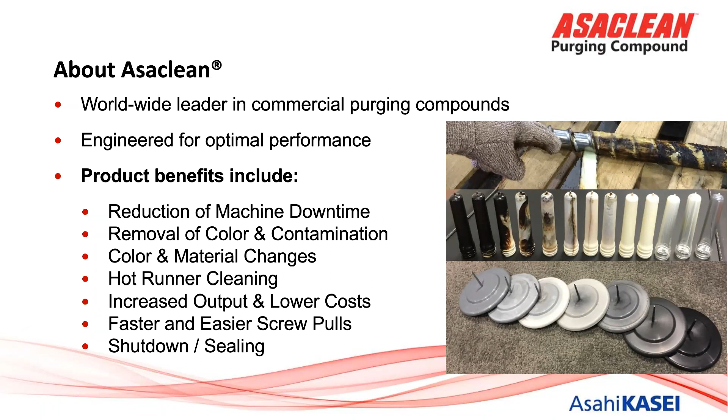So what we begin with, when we want to move toward seeing if we have a recommendation for you, we want to understand your process. So some of the basic things we all need to have crystal clear: what are your applications? Is it color changes, material changes? Is it screw and barrel only? Would you like to purge through the hot runners?

Do you need to remove carbon specks from a clear application? Machine count and size, so that we can appreciate what quantity of purge you might be expected to use, depending on the machine size and the nature of the application. Also, the type of purge compound will also determine the purge quantity.

What production and quality issues are you seeing? Which customers care most about the aesthetic of their parts? What's important to your customers is going to be important to your purge program, so that we can deliver on time, or so that you can deliver on time parts, and that they're up to spec with no defects.

What type of products do you make? So that we understand also what the aesthetic quality is, or the part integrity. Sometimes an all black part still needs to be confirmed free of contamination, because if there's any carbon in the part, it could affect the product's function.

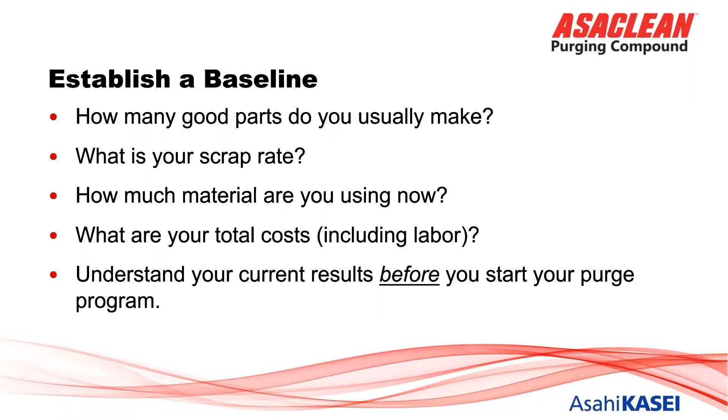It's what you're currently doing now, and what a product like Asaclean can help you get in savings. So understand your current results before you even start considering a purge program, so that it could be clear when there's an improvement. Peter Drucker, the famous businessman, said you can't manage what you don't measure. Couldn't agree more.

Okay, so for grade selection, we'll understand what your process is. We have grades for all thermoplastic processes: injection molding, extrusion, blow molding, compounding, blown film, even recycling extruders.

And we'd like to understand what are your expectations, or what are your previous experiences with purge compound. Maybe there's some gorillas in the room we need to address, or some fears we need to assuage with some direct addressing of your past experiences. We have enough products in our line so that if your issue with a prior purge was too much residue, we can be sure that what we recommend has a particularly low residue characteristic for a certain resin, like acrylic or polycarbonate.

And what are your current pain points? Obviously, purge is part of a problem-solving solution. So the problem usually is the pain to the company, which is lost machine time or too much scrap. And especially this day and age with resin shortages and sourcing issues, we want to understand what's urgent to you. And then we choose a compatible purge.

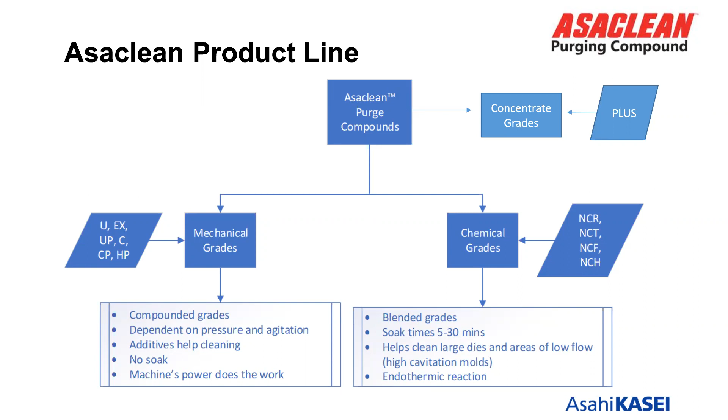You're able to control the ratio, so when you need more cleaning, you can modify the mix. A few different ways we can go here, and I'd say it's a good problem to have, lots of options. That would basically help us deliver a more refined grade recommendation.

Mechanical purge compounds, simply put, scrub and clean strictly on the path that they travel on. So a mechanical purge does depend on pressure and agitation that we hopefully can obtain from the machine. Injection molding is therefore just a perfect marriage of a process for mechanical purge compounds, because we have the luxury of a reciprocating screw, controlling screw position, back pressure, rotation speed, and injection speed.

So with the right procedure, Asaclean is a good product, but when used with the right procedure, it can reach levels of pure excellence. So we ask you as a favor, and thank you ahead of time, please follow our instructions so that you can be sure you're evaluating the cleaning performance as accurately as you can, and so you know what you have on your hands. It has very safe additives, nothing that's going to be considered abrasive, that's going to damage the screw surface or the barrel walls or the hot runner systems, so long as we recommend the right grade.

And there's no chemical reaction, so there's no need to raise temperatures. There's no soak time, so there's no need to wait around for the purge to do its thing. A machine expert is going to really use a mechanical purge as their own tool, and they'll know how to guide the machine to do all the work.

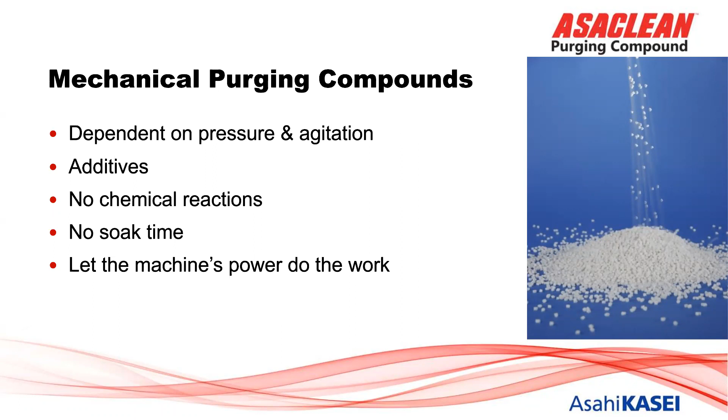Chemical purge compounds, on the other hand, while they do have carrier resins, and in some cases a relatively stiff carrier resin where you will get some mechanical push, the majority of the cleaning performance accomplished by chemical purges is through its chemical reaction. It's an endothermic chemical reaction. The only byproducts are water vapor and CO2, so no need to run for the hills. There's no toxic byproduct to the chemical reaction.

And it helps address cleaning in tough to clean areas - extrusion blow molding heads, extrusion dies, hot runner systems, or even an injection screw and barrel that might have some wear, some cracks and crevices, some valleys in there that we need to get into that a mechanical purge might otherwise have just walked right over, walked right on past. So a chemical grade is important for those types of applications and trouble areas.

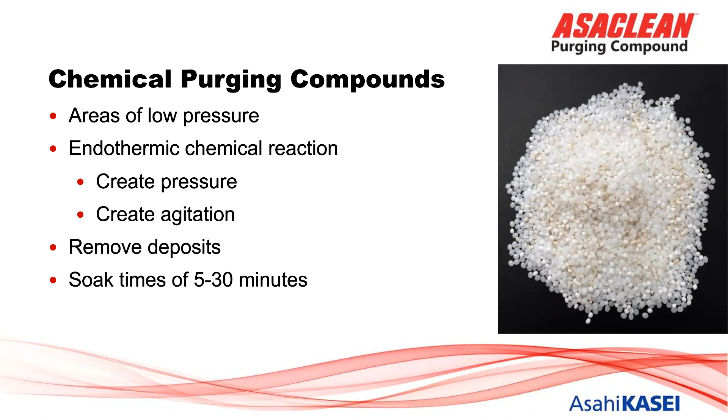Soak times are around 5, 10, 15 minutes, 20 and 30 on a rare occasion, but depending on what temperature we're at, that will dictate how long the chemical reaction will go on for.

Earlier this year, we launched Asaclean Plus, our first ever purging concentrate. The purging concentrate technology is derived directly from our chemical grades, and it's a way to supercharge your processing resin. You will only be receiving the active ingredients, and you can adjust the ratio depending on what cleaning is required, which does allow for some pretty amazing results when it comes to on-the-fly purging.

So even though it is a concentrate, meaning that it's like our chemical grades where there is some soak time and some possible temperature adjustment, it's possible that we can run this without requiring process temperature changes. So it's a pretty bright future for concentrates to have their place alongside chemical grades and mechanical grades.

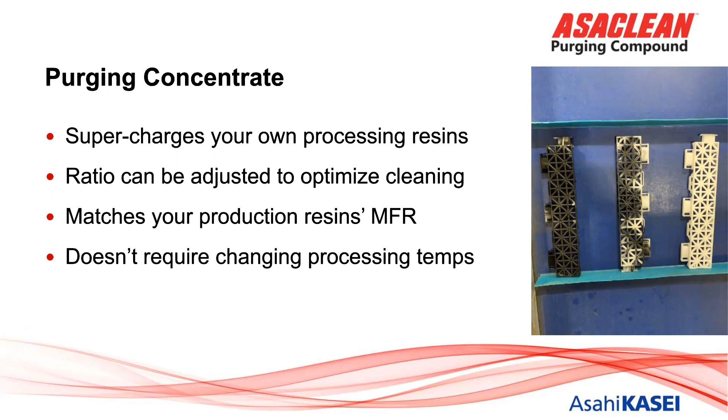Some tips in injection molding would be, for example, to improve the cleaning in the nozzle body area, the check ring area, which is really where the majority of hang-up can occur as far as the screw and barrel is concerned. Increasing the temperature in that nozzle body about 50 to 100 degrees can solve an issue that might otherwise be a nozzle body teardown that takes 4 hours. So be careful with resins that are likely to hang up in nozzle bodies, like Santoprene, for example, is a real pain in the neck. But sometimes it's simply just a nozzle body issue, or a nozzle body design issue.

We also have purges that are moldable. So for hot runner purging, we do have a closed mold method that takes advantage of the pressures of the system, and that will lead to less purge quantity used. It's another way of taking advantage of the pressures that the system and the machine provide to help a mechanical grade that's moldable do its thing.

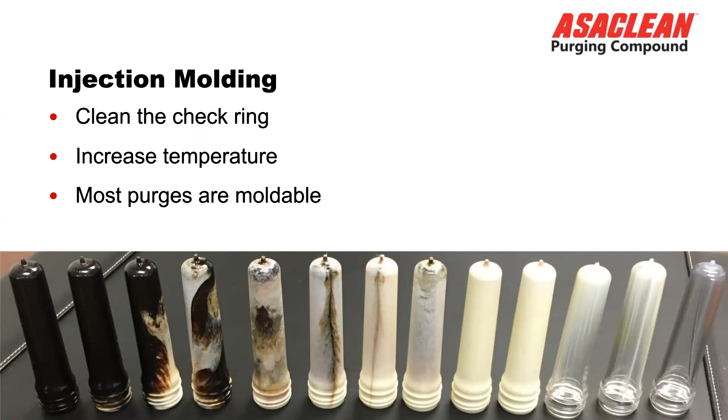So for extrusion, for many years we still do have mechanical grade success in extrusion, but some hardware in the extrusion process does benefit from chemical grades, like die heads, downstream equipment, breaker plates, and gear pumps.

So particularly the screw and barrel also - there's a low pressure concern in general, right? Extrusion is a lower pressure process than injection, so that does take away a mechanical grade's ability in some cases to perform as well as a chemical grade. So here, this is an instance where we have the crossing of two different possible solutions. Both mechanical and chemical have their respective high probability of success for this process.

So twin screw applications, also no problem. Obviously, we just be careful with the starve feeding as opposed to flood feeding. Make sure that we're keeping an eye on torques and pressure plugs. And then, of course, the areas adjacent to

vents, a vented barrel - those zones near the vents, because it's lower pressure, you could have some issue getting some mechanical scrubbing there as well. We'll ask you if you can plug those vents, because if there's a chemical purge compound being used, we'd like for you to help contain the gases as they're created from the chemical reaction. And so we're able to address those, or at least take those areas into consideration when making our final recommendations, both on product and procedure.

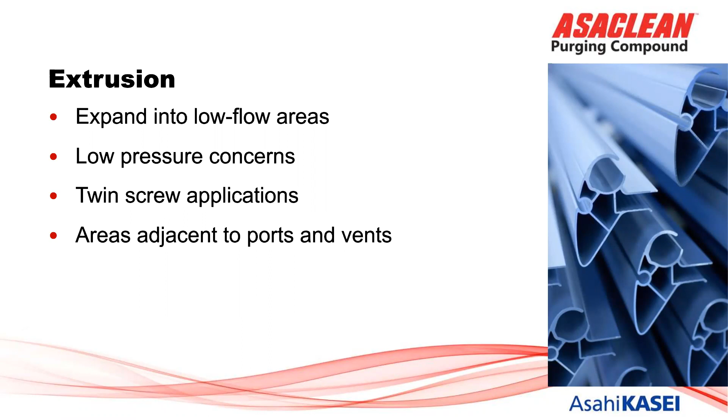All right, the cost factors. Let's get into it - cost per purge versus cost per pound. So clear difference here. Cost per purge includes the time that it takes converted by your machine hourly rate, and includes the amount of resin that was used to displace the purge out of the machine, and also the amount of resin total in your scrap on your next run, which we presume all these measurables should improve when compared to a better purge option.

You'll have less lost machine downtime, less lost machine time, less scrap, all of which should help reduce that total purge cost, which is really the cost that we should be looking at - cost per purge. Cost per pound is really only one of 6 factors when looking at a cost savings analysis. So giving a cost per pound any more priority than 1/6 of a solution, it's a risky thing to do.

So we look to be consistent in the data collection. Make sure that what's measured and what matters with your current purge program, that those same measurables and that same data be collected with whatever new purge method or purge product you're looking to consider. In the end, comparing 2 purge methods should be very easy as far as seeing which one is best for your company, because 99% of the time it's the one that costs you less, or the one that solves your problem, the one that makes your customer happy.

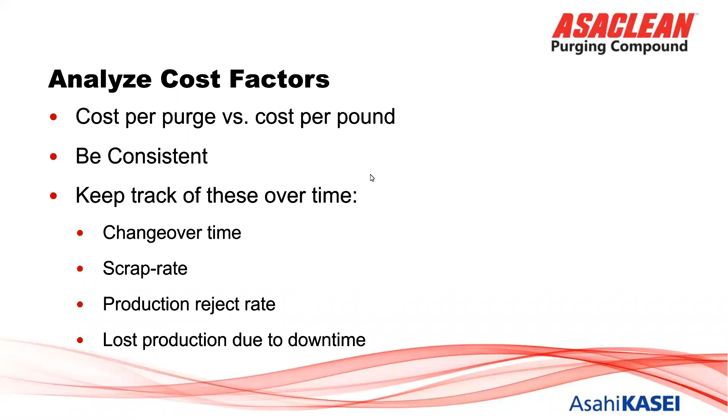So keeping track of these over time is critical. If we want to see what effect a purge has on these particular measurables - time, scrap rate, reject rate overall - and knowing the corresponding cost factors, it'll help you get to a cost savings analysis real quick. And that's the best place to be as far as comparing 2 purge methods.

So why use a purge? Well, it improves safety. If you can see the look on some of these maintenance guys' faces after we save them from having to pull a screw, they can spend their time on other tasks, far less dangerous tasks.

Obviously, increasing machine capacity - if you're having trouble filling orders for 10 customers, well, then you can't consider being a 15 customer business or bringing in more business. So freeing up machine time is a big one for purge compound.

You lower your maintenance costs, obviously, because the expectation should be that a higher performing purge compound will send your screw off to maintenance far fewer times a year, or maybe never in best case scenarios. So it's common for customers who, before implementing an efficient purge program, were pulling a screw every month, every couple months. After successfully implementing a program, now it's every 18 months, or they can't remember the last time they pulled a screw.

So it's just a question of efficiency. It's going to improve the usage of your resources, from energy to manpower to resin to machine, and that first pass yield is always nice to see on the production floor. Where as soon as you get started, that's when you're really getting started, and it's not beginning with a few hours of contamination or prior color showing up in the part.

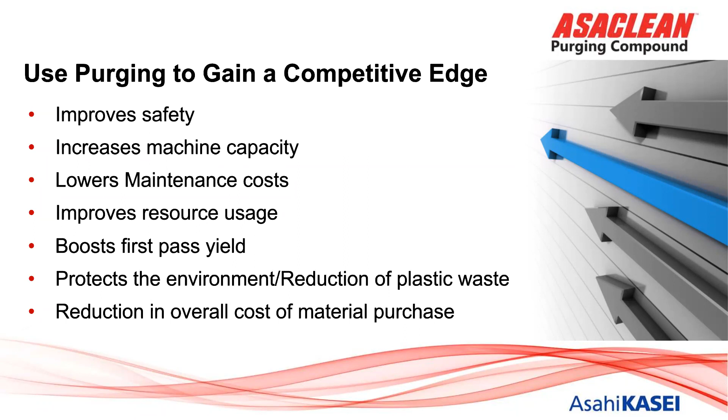This is stating the obvious, but please follow the instructions to the letter. It's just a question of making sure it's communicated that we're not saying it's a lack of trust of the process engineer, we're not saying you don't know how to purge a machine. We'd just like you to use this particular product's specific recommendations because it's going to work better for you. You're going to use less, it'll clean better, and you'll use less of your own resin to get the purge out. Following our instructions for both purging and displacement, that's going to get you to the promised land. After you consider what we recommend, you're certainly free to try something if you think it'll lead to better efficiency. And it has happened.

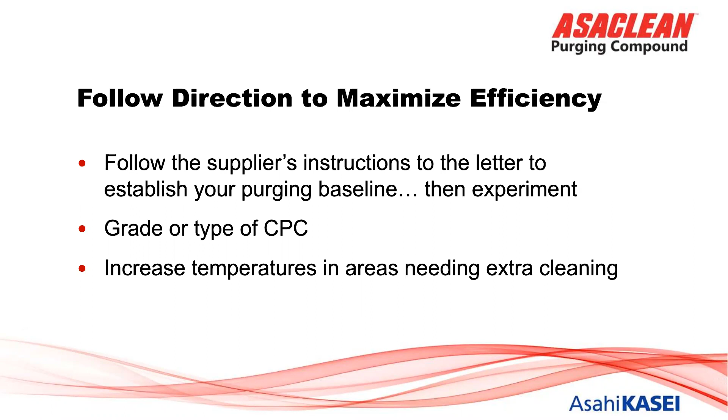Together, we will help you determine the grade and type of purge compound best for your needs, and we'll make sure to give you those important tips on the temperature profile of your system to get the best possible cleaning as well.

In-house purge compounds are very common, but we should always look at their possible deficiencies. Are they resistant to oxidation? Are they thermally stable? Can they withstand being used as a shutdown sealant? Are you creating possible layering inside the machine? How are your startups, what do they look like? Are you seeing contamination from the resin that was run last week? Also consider the viscosity of the in-house purge - is it easy to remove with your next material? So on and so forth - just different possible pitfalls for in-house purge compounds, resins, and regrinds.

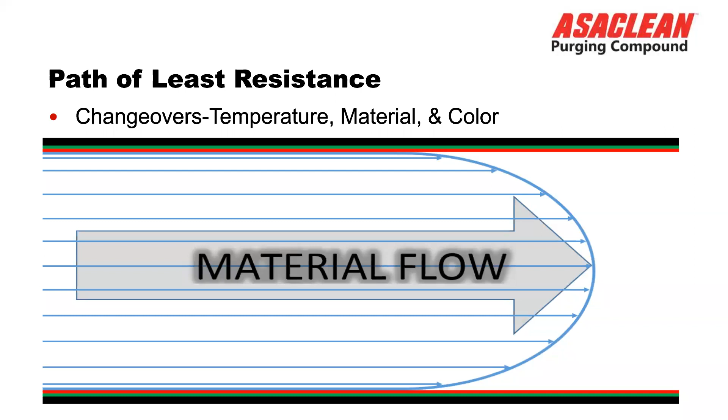According to the science of fluid dynamics, normal polymer behavior is a laminar flow, where the higher rate of speed is right down the middle. Towards the channel walls here you see the red and the green - these are examples of layering. It's very normal and very common for polymers to do this. And we're thankful for this, because this gives us a lot of work.

Accumulation of layers happens on the barrel wall and also on the screw flights. It's tough because once they're on there as a layer, the clock starts as far as thermal stability goes, and those layers almost always become degraded, or they'll just sit there and show up who knows when. It's not stuff you want to have in there. It's going to reduce your output as well - if you're talking about layers over time on the screw flights, you're not going to be able to carry the same amount of material in that barrel or screw.

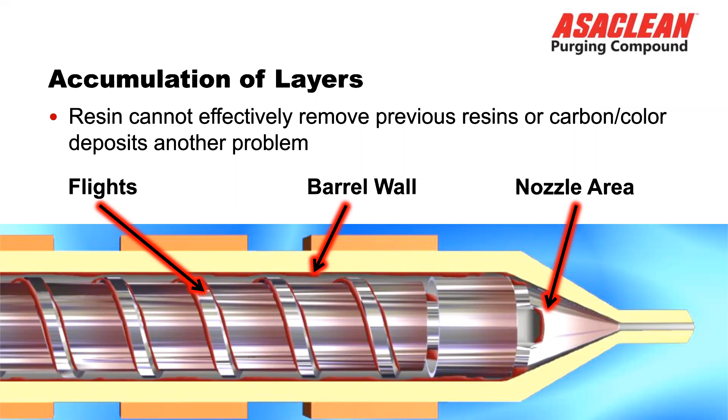Going on to an example of a color change in injection molding: using just white polypropylene, it took 1 hour 45 minutes and 350 pounds, for a total of 871. But when you used Asaclean, that 1 hour 45 minutes turned into a half hour, 350 turned to 80, and there was 20 pounds of resin also used to help displace the purge efficiently, because the purge event's not over until the purge itself is out of the machine.

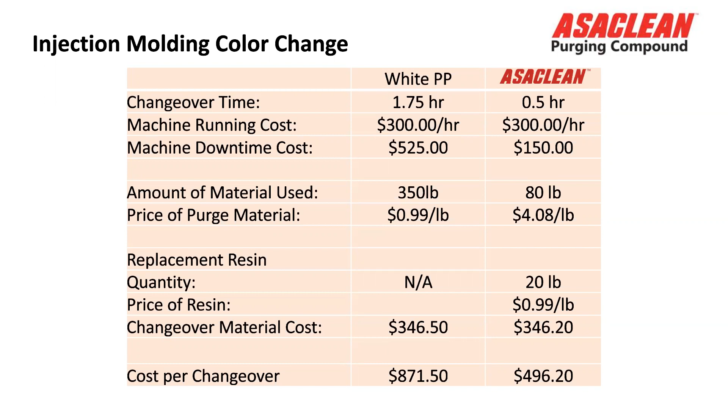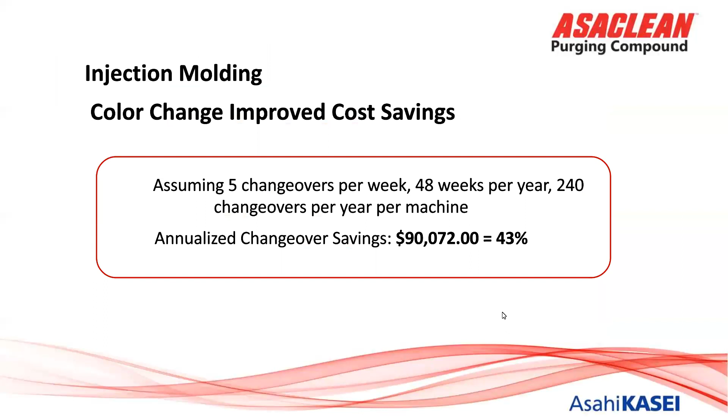One very common mistake: as soon as the purge comes out clean, the engineer gets excited and says, alright, let's go back to production - see what it looks like here. It's very common to forget that step, so let's dedicate one more stage of good procedure to help get the purge out of the machine. Anyway, only 20 pounds were used here, and that's one heck of an improvement on spending - 871 to 496. If this happened five times a week, only 48 weeks a year, you're looking at 90K over the course of a year on just that application - 43% savings.

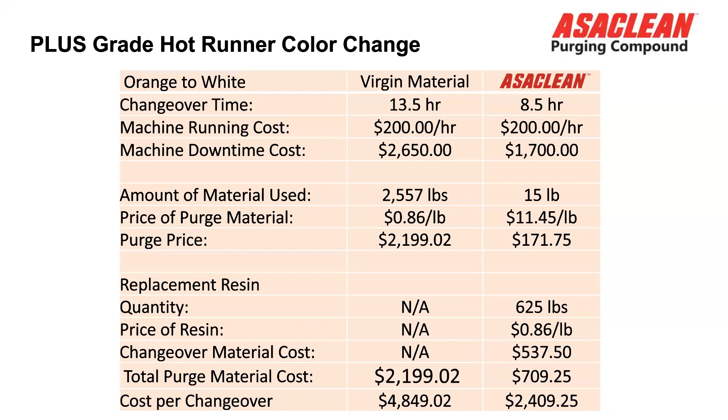Here's a recent example of a trial with our concentrate. As you can see, the amount of material used is just drastic. You do have to include the 625 pounds of resin used alongside the purge concentrate, since it's something you mix - the purge concentrate has to be mixed with your resin or with a resin that can be provided. But as you can see, on every measurable, from the time to the total amount of material used, it's no surprise that you get the savings that you get here.

Here's a comment from a happy customer: so easy and works incredibly well. Those are nice things to have in a product.

The projected annual savings here is pretty heavy, at 50%.

So preventative purging, just to be clear, there's reactive purging and preventative purging. Reactive purging means you want to count on having a big enough gun or a strong enough purge, because you're reacting to contamination already present in the machine. Preventative purging, in most cases, nets you a lower total spend on purge, because you're purging before the contamination occurs.

One very common question is, how often do I do that? That's really going to depend on your scrap rate and your resins. We've seen programs where people purge every day, every weekend, or once a month. Some resins can afford to purge every couple of months because they're pretty noble, pretty stable.

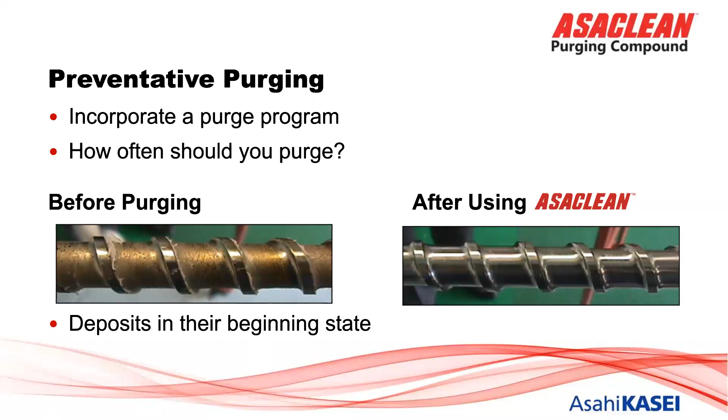On this chart here, everything right of the vertical black line marks where the revised purging procedure using Asaclean started. As you can see, after every startup, there's a period of lower scrap, but it doesn't last long, and the defect percentage is in flux, constantly coming back up. You install a new screw, you lower scrap temporarily, but then here goes the scrap again. When you use an effective purge program that successfully removes layers and actually removes the polymer, you're going to see consistent lower scrap rates, as shown to the right of the line.

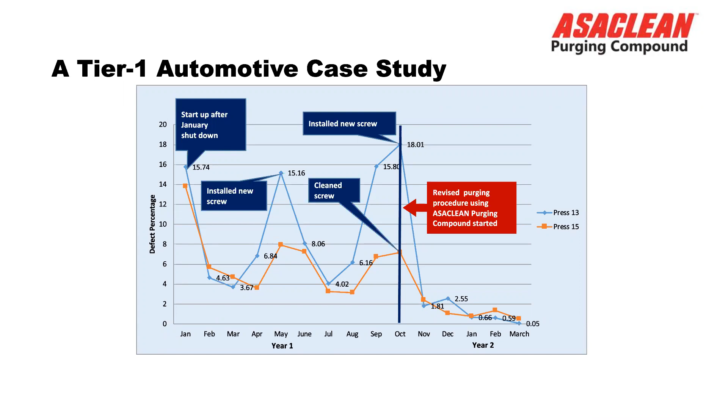Pretty drastic improvement there - 18 to 0.05, 7.2 to 0.59, at this automotive injection plant.

Shutdown and sealing is the most popular preventative program. It's basically purging before a shutdown, and instead of displacing the purge out of the machine, you're leaving the machine filled with purge, keeping out the oxygen, which is the catalyst for degradation. Also, some of our grades, when left in the machine, shrink and contract, pulling away from the barrel and screw surface area, giving an added cleaning effect. But for the most part, it's really just a matter of effectively cleaning and then sealing your machine so that your startups don't have an hour or two or more of fighting off carbon.

So do we recommend you seal every machine every time? No - we'd like you to start with the ones that give you those headaches during startups, the more heat sensitive materials.

It's an often overlooked function of a purge compound, but some grades are versatile in that they can be used for sealing, for hot runners, for material and color changes, and could even do a decent job on carbon. It's good to have certain grades that versatile, so you're not using 2, 3, or 4 purge compounds. We can try to keep that grade selection to a minimum.

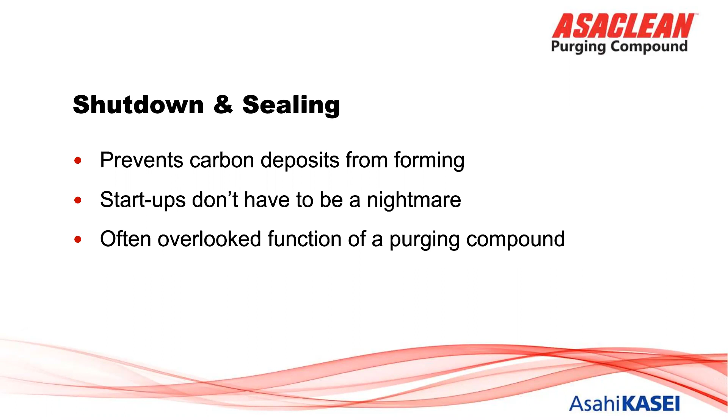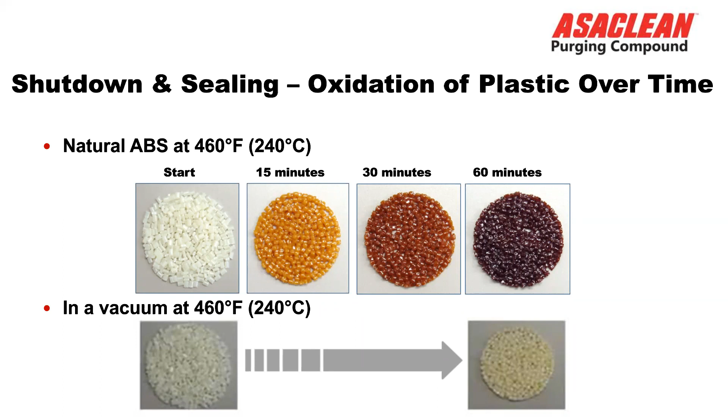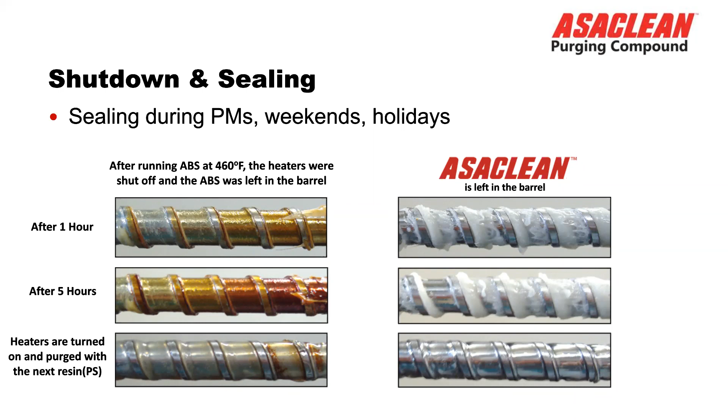So shutting down and sealing really is just going to help prevent the screw images on the left. And on the right, on the bottom right, you can see the best case scenario of what a well maintained, well cleaned screw can look like with purge compound. Screw pulls.

Not sure if we have any maintenance guys here today, but this is one of the more popular uses of Asaclean. We have a grade called the EX that's the strongest cleaner we have, and it gives you 3 benefits for those guys in maintenance. One, probably the most important to some of these guys, is the physical force required to pull the screw out of the machine. After you purge a machine with the EX, you should have a far easier time pulling that screw out of the barrel. The EX, as you can see in this picture, and I'll show you a video shortly, actually wraps around the screw like a ribbon. It's easily removed from the screw with just a glove even.

It's almost like an orange peel. So it does contract and sort of binds together, which makes it a very unmessy ordeal.

And then the third benefit, of course, is once you remove that peel from the screw, you're going to find a screw in a far better state, where previously it took you a couple hours and a few guys with wire brushes and blow torches, or throwing a screw in the oven for a few hours. It turns it into maybe just a few minutes, wiping a little bit here and there off, and you're good to go. Slap that screw right back in there.

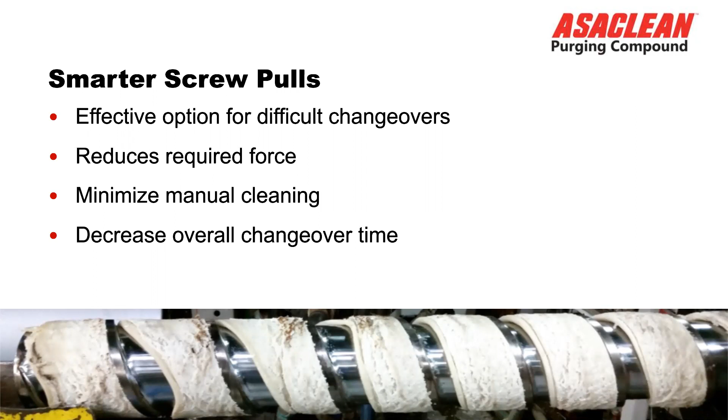So that would minimize manual cleaning, which can be a bear. And aside from you lucky folks who have backup screws, this would decrease your overall changeover time if you're not waiting on a screw to be serviced and maintained.

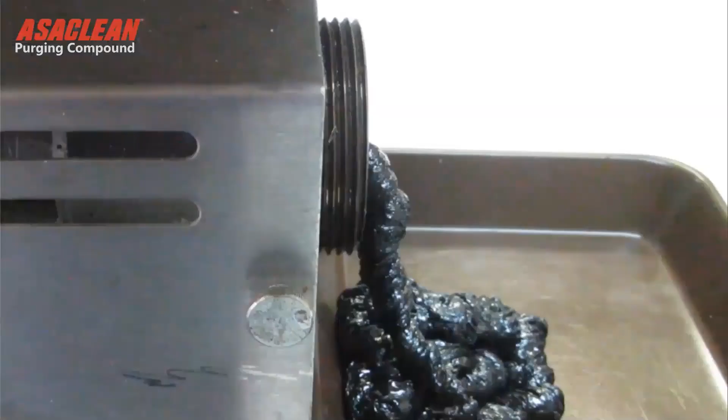Here's the video. Now, obviously, we understand this extruder that you're seeing here is a lab extruder, so this is really for visual purposes only. And what we're trying to visually illustrate here is the ease of pulling the screw out.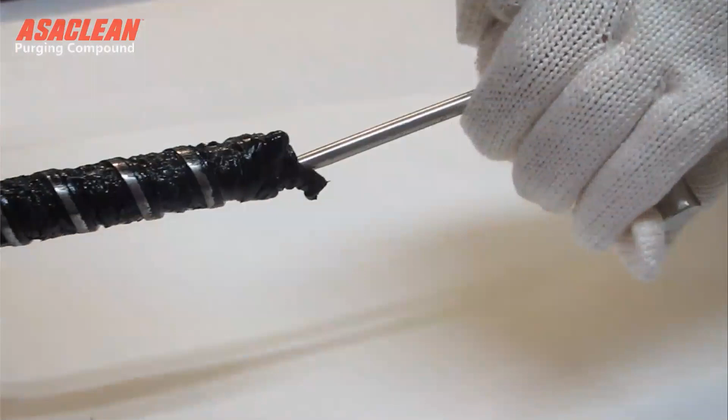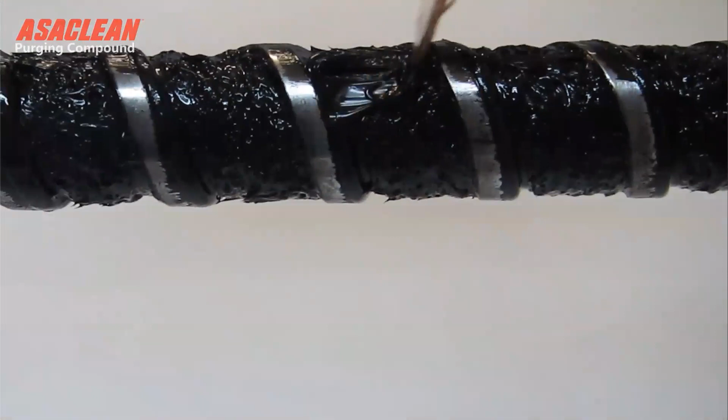As you can see here, when running black ABS, the guy's using some force there. Now, this is a lab extruder. I promise you that in a real life production injection or extrusion machine, that pulling of the screw is far more difficult.

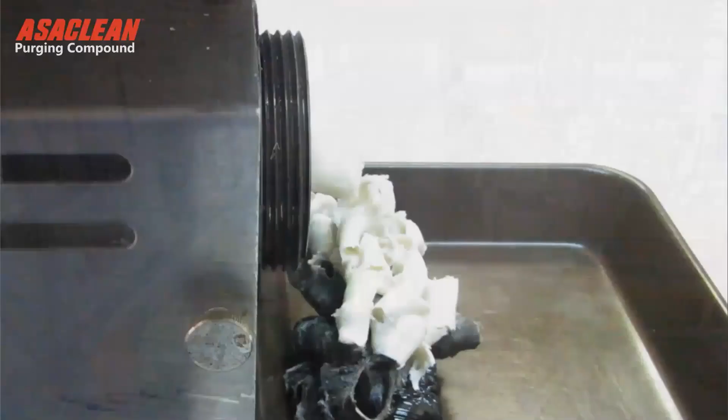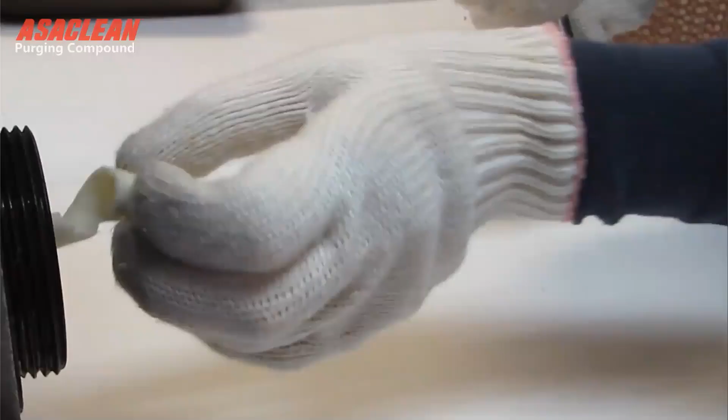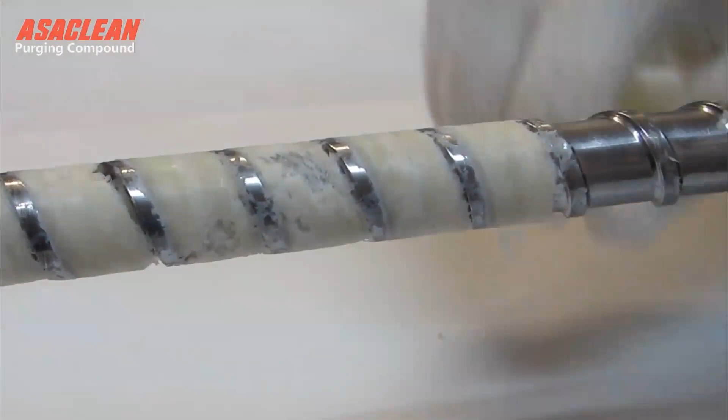But then with Asaclean, with the EX grade, you'll see, first off, the difference in the consistency of the material. The ABS was far more gummy and far more difficult to remove. Meanwhile, the Asaclean stiffens up pretty quick and turns into almost like a potato peel or orange peel, and it comes off real easy. And then hopefully you won't have much cleaning or scrubbing or blowtorching left to do.

All right, how do I move on from here?

Okay, so like we said, we find it very helpful when all the measurables are accompanied with the corresponding costs. So let's do it again here for a screw pull. A screw pull might cost 12 hours of machine time, and that particular machine size running that particular product for your customer, maybe it's 85 an hour. So we have to look at that time as having that cost, carrying that cost.

And as you can see, we're looking at some pretty big savings. So instead of 12 hours, it's just going to be a few minutes. And in some cases, in the best cases, we do save you from pulling the screw. Save the instances, of course, where you're obligated to pull the screw because that's what you promised the customer. But even those, we can help you, because we want you to use the least amount of time and effort to pull the screw, to clean the screw, and to get it back in.

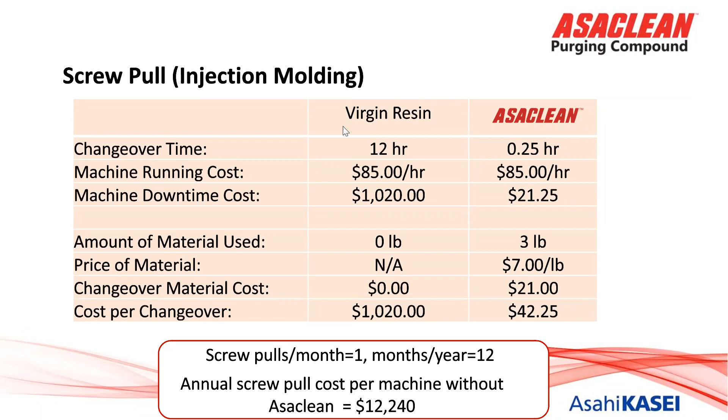But it's also just makes for a safer workplace. And at one screw pulled a month, you're looking at some good savings as well. It's always nice to annualize your savings to see the real effect over the course of time.

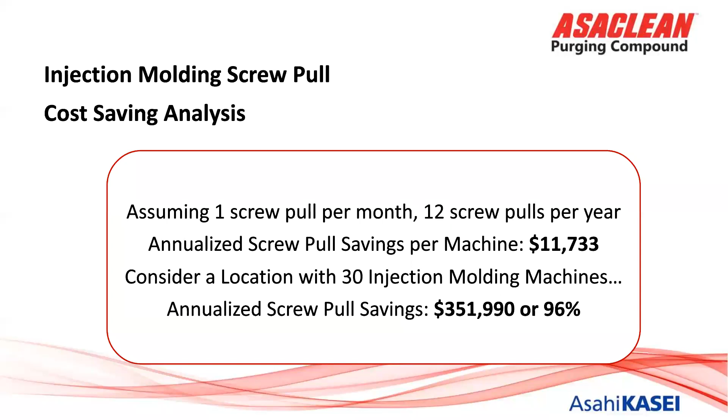So just a few added notes here on our services. Asahi Kasei as a whole, we offer incredibly advanced R&D and product development, and so we want you to see us as a trusted supplier that is, firstly, a quality supplier. We've been very fortunate with our sourcing and with our material sourcing, so no concerns on providing you with product. Knock on wood.

And we have our team. Most of the guys on our sales team actually have on the floor experience. So combined, we're talking about a ton, really a ton of plastic processing expertise. So it's not just purge knowledge. We have some plastics industry and plastics processing knowledge as well to help us help you.

And we are customer facing. We like to be at the trials. We like to visit our customers, and we also have several warehouses, so we can help keep your shipping costs down. We always ship from the nearest warehouse. So a few different ways we can try to be a stellar supplier for you, so service is extremely important to us, not just quality product.

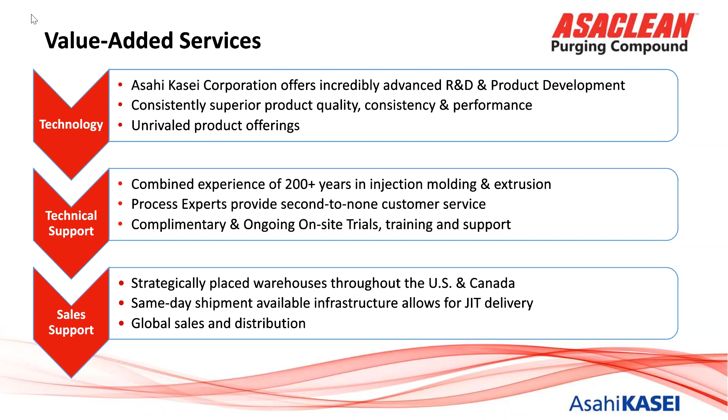If you'd like to learn more, please visit our website, asaclean.com. I want to thank Tom Hanvey, our marketing manager, for doing just a bang up job on putting a ton of information together. But please set up a call with a technical service representative to help you with your grade recommendations, as the information on the website is general on purpose, but we want to make sure we understand your purge program more specifically, and that way we can give you a more customized recommendation. And I think that'll do it.